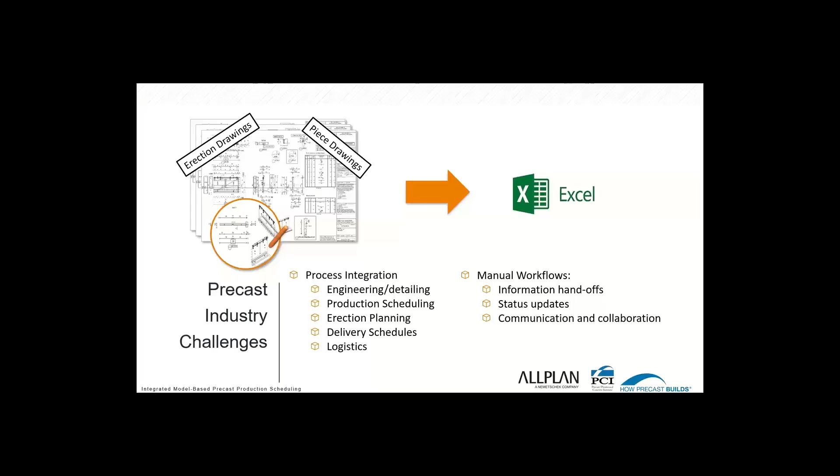So what we see today is a very disjointed workflow. There's relatively little integration, a lot of manual handoff of information. Statusing is done manually, production planning is done manually. Excel is the tool that kind of dominates this workflow. And that's fine insofar as it goes, but it leads to a lot of unnecessary confusion, risk, and ultimately lack of optimization and using capacity that you have.

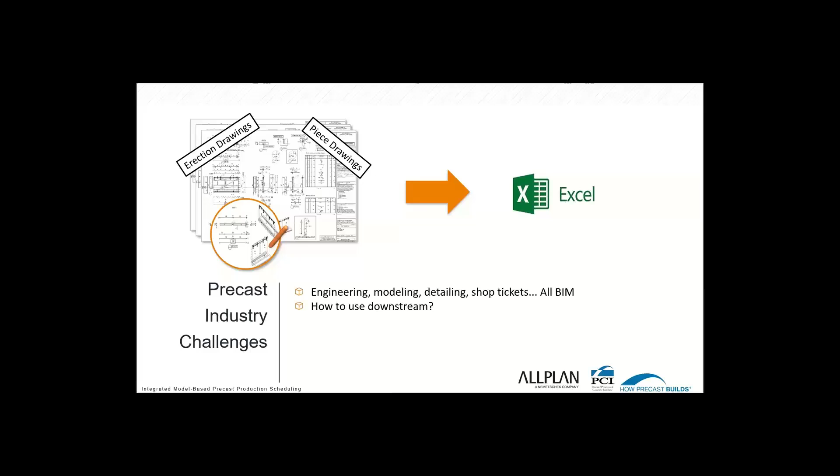So we are doing all of this engineering, the modeling, the detailing, shop tickets, all in BIM. We have this information-rich database of what this building consists of and what needs to be done to produce it. How do we use that downstream?

Well, our answer to that is TIM. We consume in TIM the information that was created as a part of your engineering, detailing, modeling, shop ticket production process, and use it as a single data source to drive everything that occurs after that, from drawing acceptance and quality assurance for engineering work through to erection sequencing, production planning and optimization, and then the actual casting, pre and post casting quality control, as well as then managing the yard, locating objects, managing stock, and feeding into shipping and logistics.

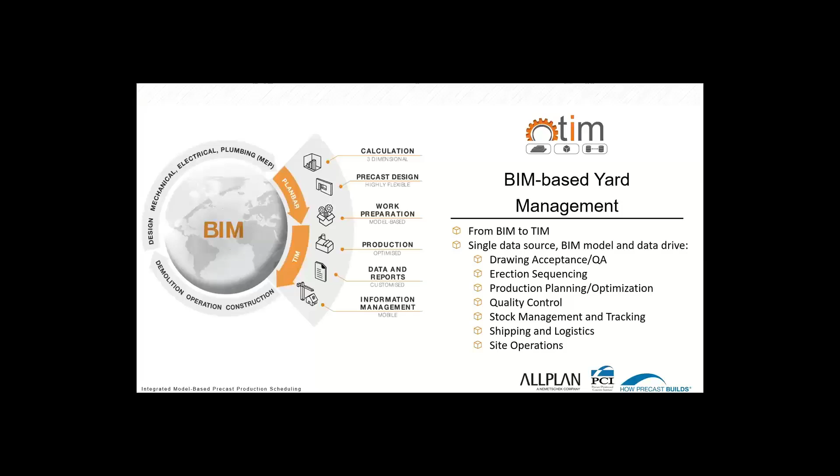We also have a mobile platform, which in addition to working in the yard, also works on site for site operations, erection, and construction. So this covers several areas. One is the actual work that takes place in your yard, as mentioned.

The other is integrating data. The data from these BIM models can be used to drive ERP systems, financials, purchasing. It can also be used to drive MES or rebar bending to go directly to fabrication. We are very wide ranging in the applications that we plug into, and we're very capable of creating custom APIs and plugins to interact with things that you may have developed that are proprietary to your own company.

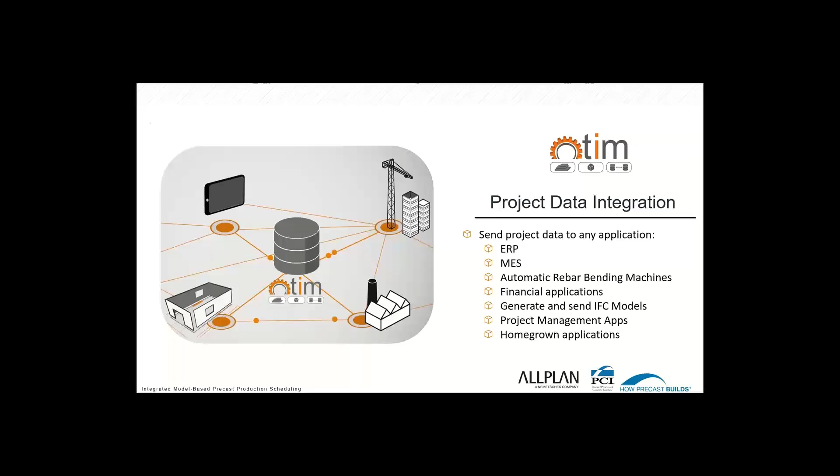In sum total, this leads to a significant increase in productivity. It allows you to eliminate slack in your physical capital rather than investing in more very expensive physical plant. It allows you to optimize your use of workforce and optimize shift scheduling. It also reduces error and risk throughout the entire process, rather than using paper, PDF, and email processes to deal with everything from the acceptance of shop tickets through to the quality assurance process.

We are digitizing that. We are providing a trail of everything that has happened on this project, all the engineering work that has been done, and then the actual physical production process as well. We are making it significantly easier to understand how your current workers are being employed, how your physical plant is being utilized, and to what extent. We're wringing a lot of the potential risk and a lot of the slack out of the existing process using digitization.

Rather than talk about it more, I'm going to turn this over to Dan Istvan, who is going to start actually showing the platform and how it works. Royce, if you could get us switched over to Dan's screen.

Thank you, David. Can everyone see my screen now? Yes, sir. Awesome. Well, thank you.

So just continuing from what David said, today's presentation is really going to be focused on taking advantage of the I that we get from the BIM model. So what we're starting out with today, continuing from the webinar we delivered back in July, is really understanding and answering a couple of questions that came off the back of that webinar from some prospects and customers of ours, centering around QA, QC, around production, and also around how do I manage my inventory? How do I know where those elements are in my yard? So those are some of the problems that we'll be solving today with the presentation I'm about to give you.

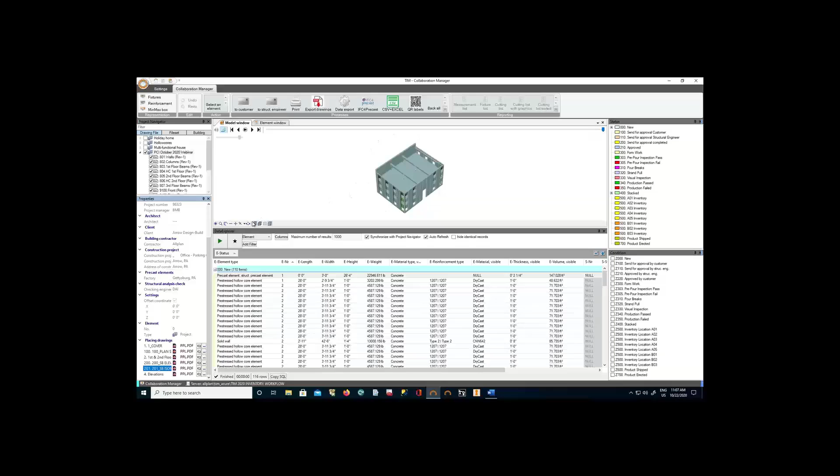So we can see here we have the ability to view the model, the 3D model that was created. This is our little office building that Brandon created for us. And also the big part of the I is going to be the information of that model, which we'll see down below here, which is the attribute data, such as what type of element is it, what is the erection number, the length, width, what type of reinforcement is it getting, what type of layering system does it have, and what's contained with it. All this information is quickly and easily selected, and you can basically, as an end user, display as much or as little of that information as you want. You can export that to Excel as well.

But ultimately, what this information is going to give you is two things. First is it's a single source of truth. So once we import it into our database, that means all of the other operations within your system can access it, either be production or production scheduling, or inventory management, or whatever it might be. They all are working from the same data that's managed in one system.

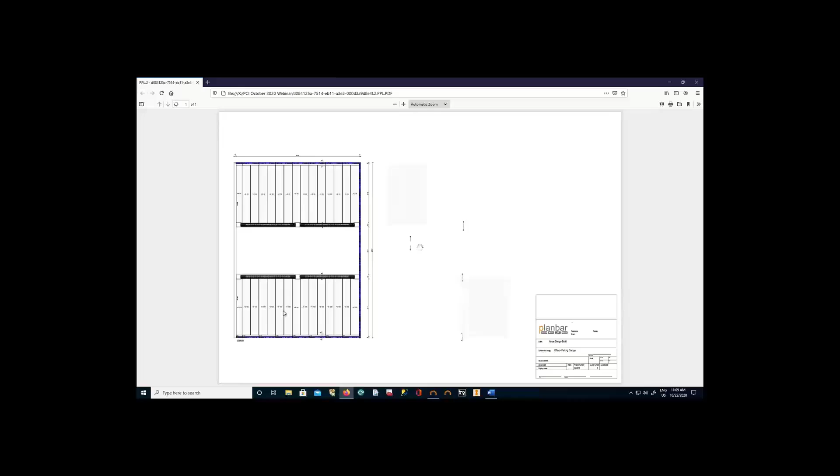The other big thing that we're bringing in, so that's the big I, but it's also the things that we always want, which is, let's say, the shop drawings or the erection drawings. So here I'm going to go in and all that information is going to be in one place. I'm going to open up an erection drawing. Oh sorry, I think I opened up the wrong one. So here, if we want to look at the first and second floor erection drawing, it's going to open up that data. Again, single source of truth, single depository. Everyone is going to be able to access this from one location, which makes it very easy. So we can see things such as erection drawings, or if I select on an element itself - right now we're looking at that beam right there - I can just go in and look at that beam itself.

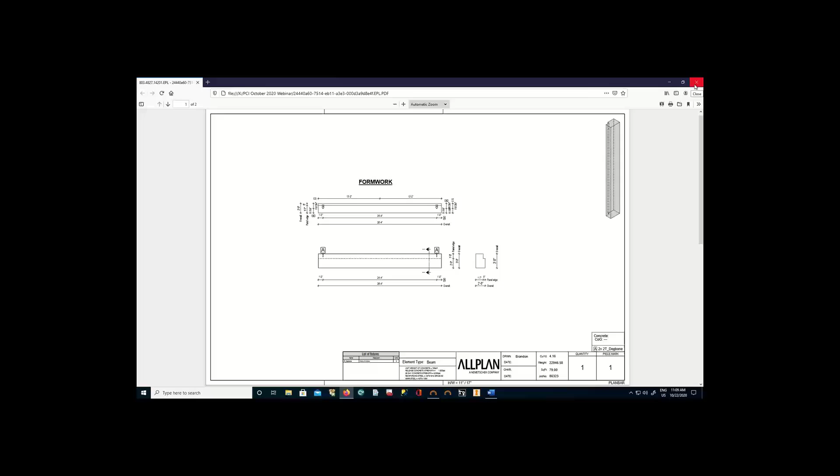So again, just a lot of information that is at your fingertips to help you manage whatever your job is, day in, day out in a precast factory. We're going to give you that data easily to access and easily organized for you. And this visibility is at the heart of everything that follows.

This information is at our fingertips as we're scheduling production. We know every single instance of a certain type of element. We can sort by embed, we can sort by concrete type, whether or not the element has a veneer. So we can use all of this information to drive the remainder of the process. It's not just having it at your fingertips, it's actually employing it.

Absolutely, good point. So next, what we're going to concentrate on is we have all this data. I've grouped it by new, so I have 110 elements here in this project that are new. We're going to go in and quickly talk about the workflow. This is very customizable, every precaster is going to have their own milestones. But what we'll go through is some QA/QC, starting from the formwork, some visual inspections, and if it ultimately passes or fails, we're going to stack it and place it in inventory.

As we move through the project, and we'll notice when we go to Brandon with the mobile app, that's how we'll first understand where the information is, report on it, and get a clear understanding, answering some basic questions. Did these elements get the formwork approved? Did they pass the pre-pour inspection, or did they fail it? All that information is being stored for you, so you have a hierarchy of it, a history of it, but also a way to report on it, so you have a clear understanding of what's going on.

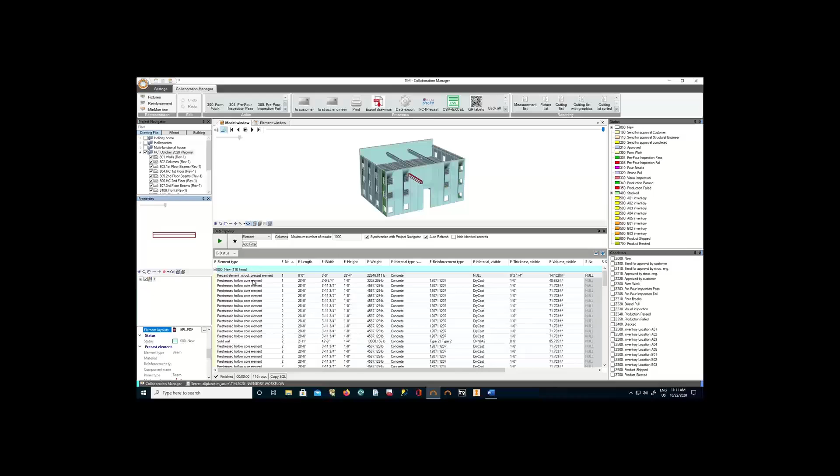Not only do we have the data here, but let's say we want some different types of reports. I can highlight this information, these elements here, and quickly export them to Excel. Just a click of a button, I have those in Excel and can customize them myself.

I can create QR labels, for instance. It's going to create QR labels, and we can scan them and quickly find out information from any Android device. So there are other things that go in there.

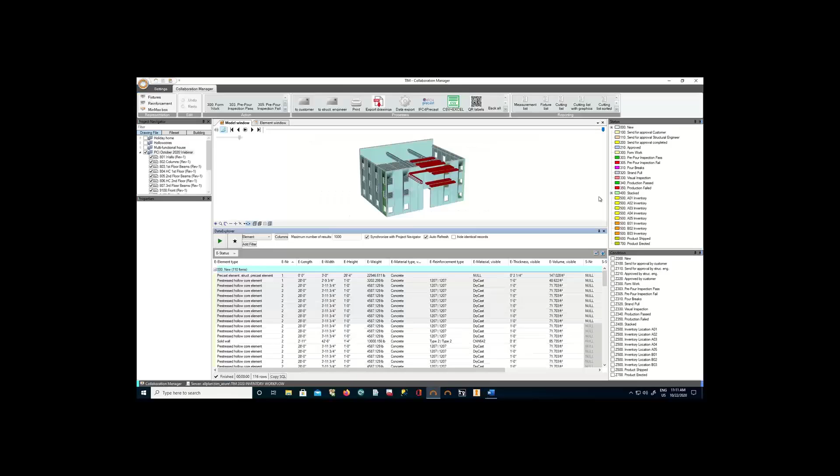I can also go in and find out what fixtures these selected elements have, so I can get a quick list of the fixtures and how many pieces they are. Instant information without having to dig through or open up the drawings. Everything is available for you at a button click.

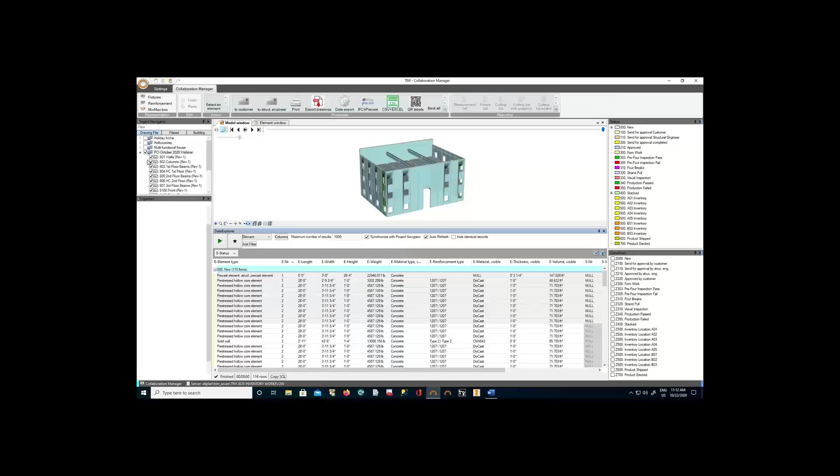I can also filter it through here. So for instance, if I want to look at just my first floor beams, I'm going to select them here. And let's say I want to see the rebar cutting list.

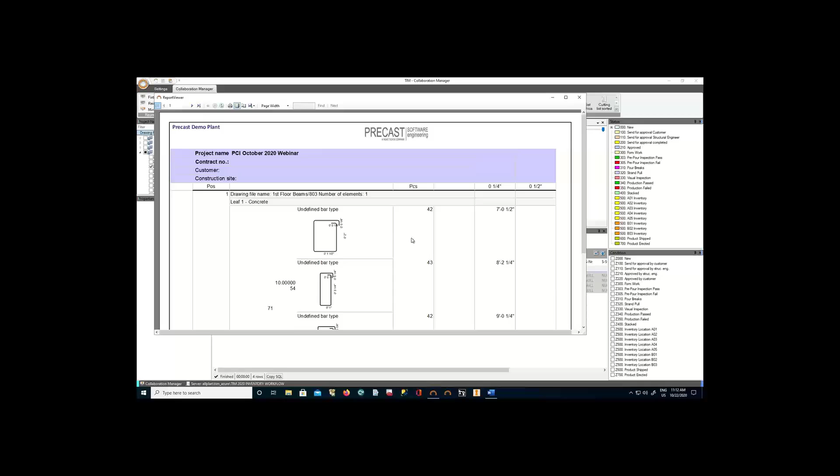So this is a really nice report. You're going to get everything included, and you'll obviously get an image as well. So instant access to your data. We can see our shapes and all the information. All these reports are completely customizable, it's up to you. But again, everything's at your fingertips.

To help you manage as you go through the life of a project. Okay, so now what we're going to do is jump in and start with what we talked about earlier, which is our QA/QC. Those are the first milestones we want to go through in our factory here.

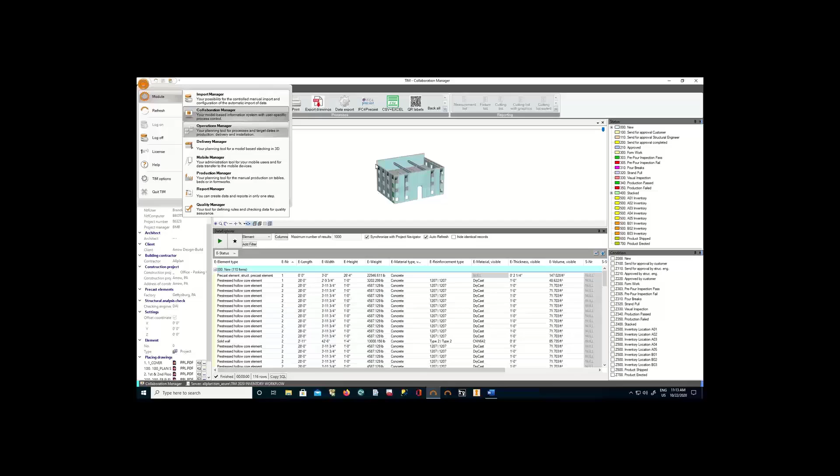So the first thing we're going to do is switch our module. Right now we're in what we call the collaboration module, which gives you an idea of where everything is. This is the hub of our system, and we're going to switch over to what we call our mobile manager. So the mobile manager is where, as a project manager or production manager, you're basically creating tasks.

These are things that you're probably already doing, either through shop drawings or through Excel, whatever it might be. So this is just a more streamlined way of doing it and a little bit more organized.

These task lists then will go directly through the shop floor to an Android mobile phone device for your employees on the shop floor to track the tasks that you've given them, either the formwork or whatever it might be. This is a very customizable workflow. Our service team will work with you to build it to exactly how you do your work or how you envision doing your work or tracking information.

The big things I want to highlight real quick are what we call templates. These templates are really the way that we set up basically every location in your yard, maybe it's your QA/QC for the pre-pour, post-pour, or for your inventory.

For instance, I've got one that I've created here for my production QA/QC, and I'm telling it I need the tablet to track these statuses, my formwork, pour break, and then I can set up here if it's going to be a time, or if it's going to record the GPS location of where it was done. So it can actually record the GPS of the tablet. A lot of options, a lot of settings.

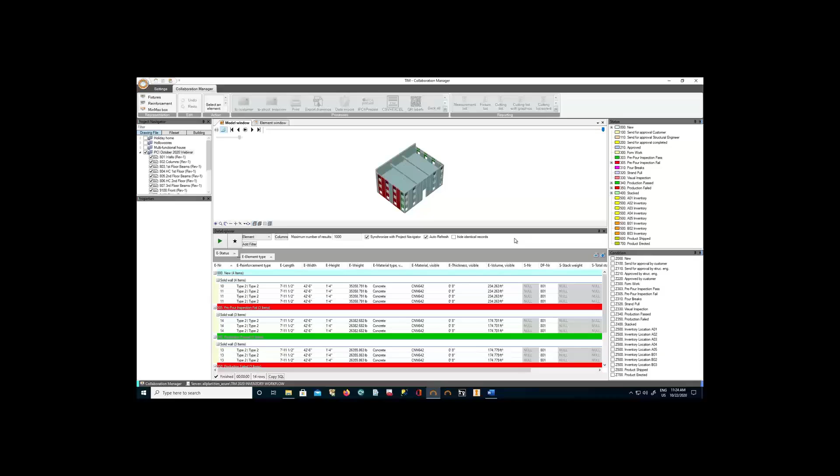So the stuff that was done by Brandon, we can see now within our model view here. We have different ways to analyze the data that he just completed for us. The simplest way, if I make this a little bigger, is I've grouped my elements by status. So we'll notice that some of those elements, specifically the ones in red, are what I want to show.

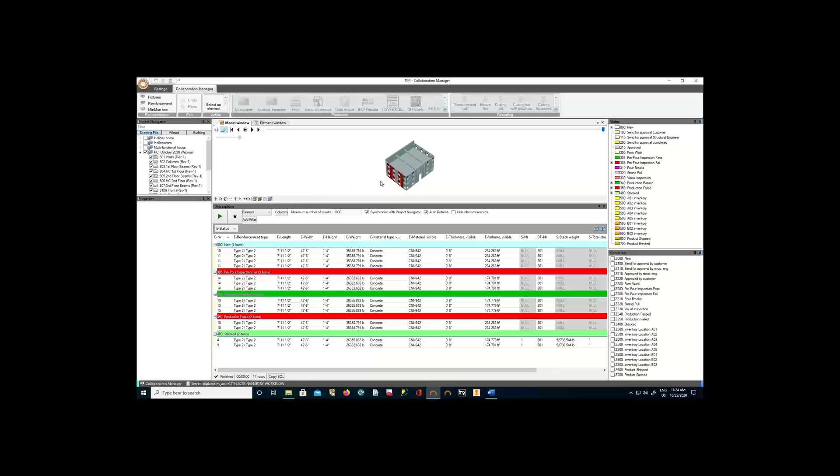You can set up different color coordination, it's customizable, but I can tell right off the bat that element 14 has failed inspection, and element 10, or piece mark 10, has failed production. So this is just a very simple visual, and obviously I can also see it within my model here.

So if I want to just look at the walls, we can see right within the modeling view here we have a color coordinated view of it. So we know in red we have an issue with these elements. There's other things we can create too, different reports, different views.

On an upcoming webinar, we'll start talking a little bit about some reports and business intelligence tools such as Power BI that we're planning for next year. I can create an Excel, but we can also set up some high level reports that are automatically updating, so I can have a clean view of anything that's passing and failing. We'll get into that more in a future webinar.

But the big point of it is just managing information back and forth between multiple mobile devices into the system. Again, now I have a single source of truth. It's all coming back to the database here, and I can tell exactly where those elements are and what's going on with them, and start working with them as we go forward.

Okay, so the next thing we're going to do is - that's just a simple example of some customizable QA/QC processes we can do anywhere throughout the system.

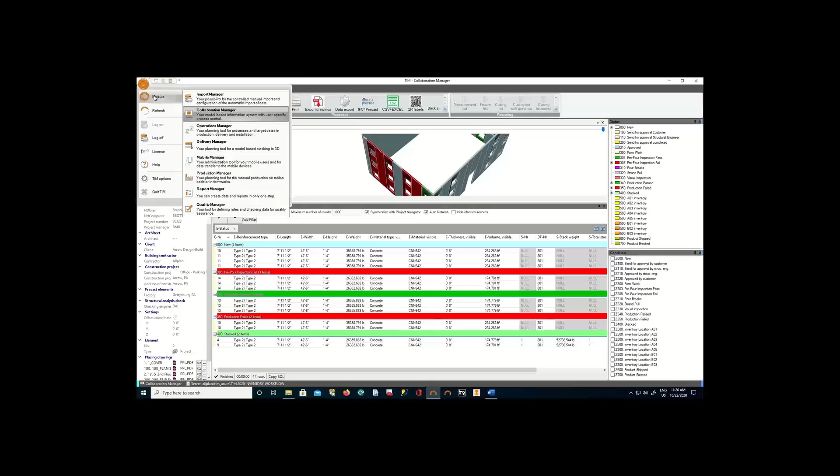Next, let's talk about going in and organizing these, either for inventory, or if you have a just-in-time type of system, onto a trailer so they're ready to be shipped. This is what we call our delivery manager. It doesn't have to be just for delivery, it's just a way to basically organize our elements as we finish production.

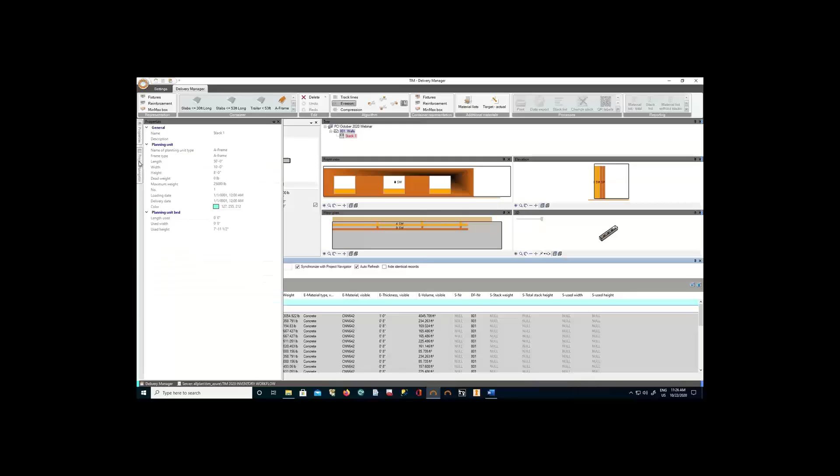So I'm going to quickly switch over. We'll do walls in a second, let's just do a couple of hollow cores. We're going to do two different types of stacking here. The first one is flat stacking. I created one ahead of time, we'll create another one, but let's explain real quick what we're doing here and what we have in front of us.

Within our settings, we have our factory settings, which are implemented as we set up your system. We basically try to replicate the different areas in your plant, the different things you want to put in there. So we can set up things such as an A-frame type of stacking, where basically it's a left and right type of area. It's really customizable, we can have multiple areas that we put it in.

Then as we're organizing these, we can set up whether we're doing them upright or flat - all customizable. We set up some constraints: the length, width, and height of the area we're putting it in. Same thing here - if I go for my slabs under 30 foot long, we can set up the constraints for it.

For these, we're going to go in and organize them flat. We can also set up, going back up here, a maximum weight of how much weight we can do.

So there's a lot of things you can customize to help replicate what you're doing today. The big factor in this, and a lot of precasters we've spoken to over the years, is that this is usually done in either an Excel spreadsheet or a bit of an Access database they've created. The big thing we're adding is a value add. Again, single source of truth. You're taking information, not recreating it, but adding the visualization part of it.

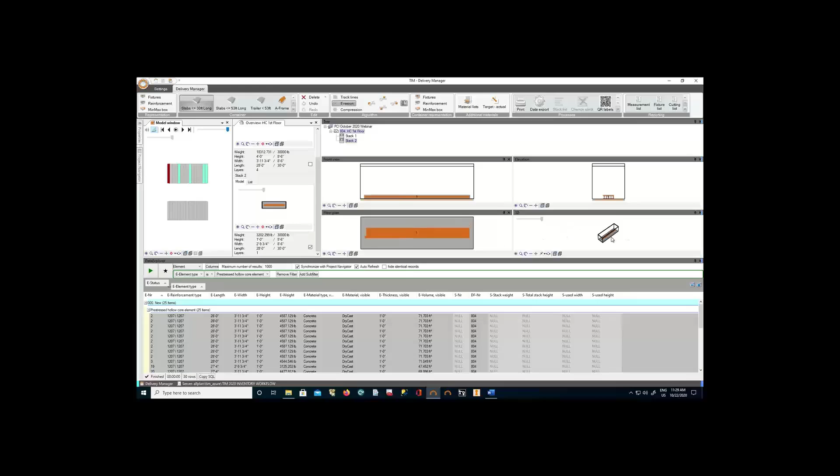And I can go in now and start adding my elements to it. So basically I've got my list of elements down below here. I can go in here and say, let me just see my hollow cores. I've got a filter set up for my hollow cores, and I can start adding these elements. We'll notice how it's added the element. If we zoom in a little bit, it's added the element. I can see it right there, and I can start placing them on top of each other.

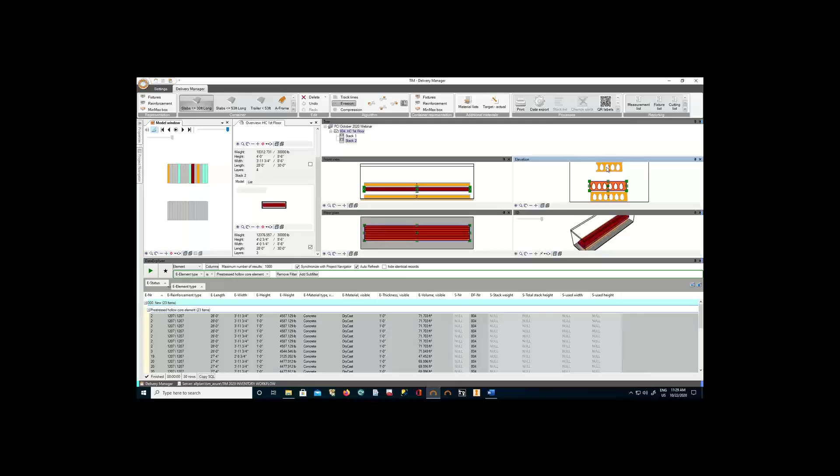I've done this on purpose - I've got a smaller one on top, and I'll come back to it in a second so I can place the other one. The nice thing is this user interface is completely flexible. I can just click on this, drag and drop it, move it on the side, or put it right on top. It will snap as well. I can move this down, so you have complete control. I can move it to the right - it's really up to you. Right now I've set the default to go to the center of this stack. I'll put this one right on top.

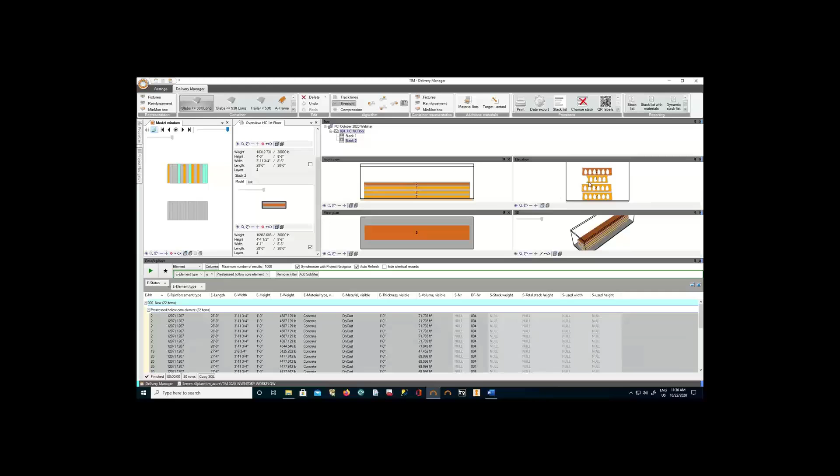One thing to keep in mind as we look at all of this is that there is immense customization available for all of these things. We can customize the actual layouts you use, not just for shipping, but also the report formats, and the QA/QC documents, especially with regards to QA/QC. What typically happens is we take a look at the existing paper process and do our best to translate it into something that's minimally disruptive, but digitized.

And I just rotated one to give us an idea - this might not be the actual way that you do it, but you can rotate them. You can basically manage them however you want to. It's a very simple way of really organizing your elements as you're going through them.

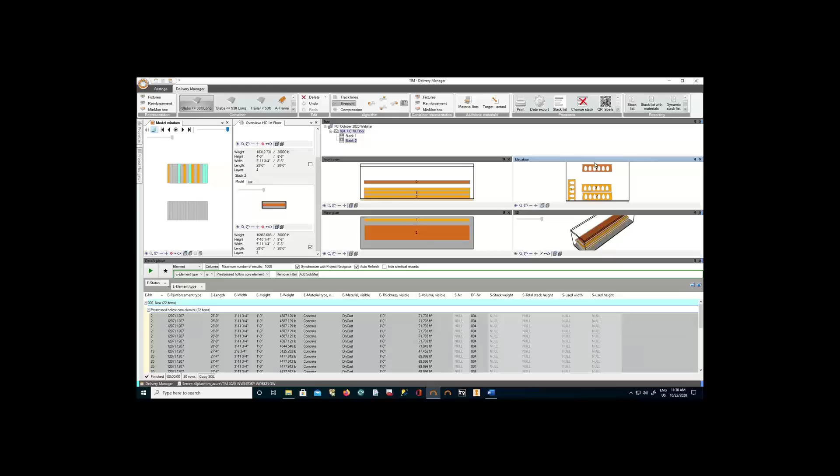The other nice thing that we can do, I think we could actually play Tetris with them, Dan. Exactly. So the one thing that we can then do is create a nice little stack list.

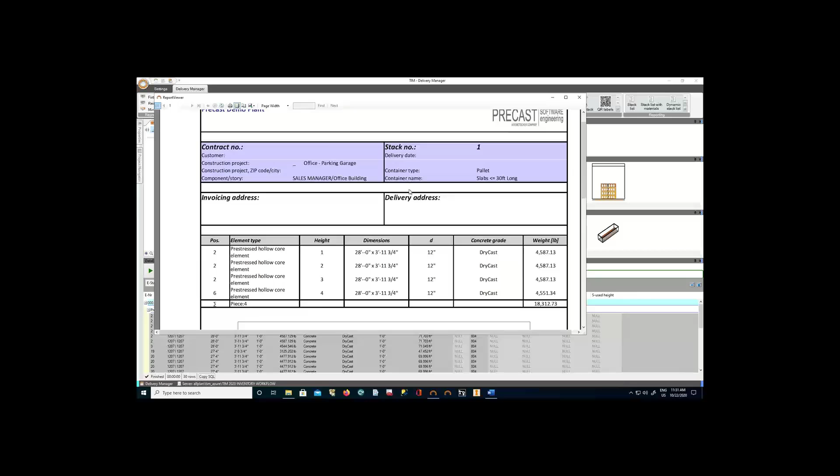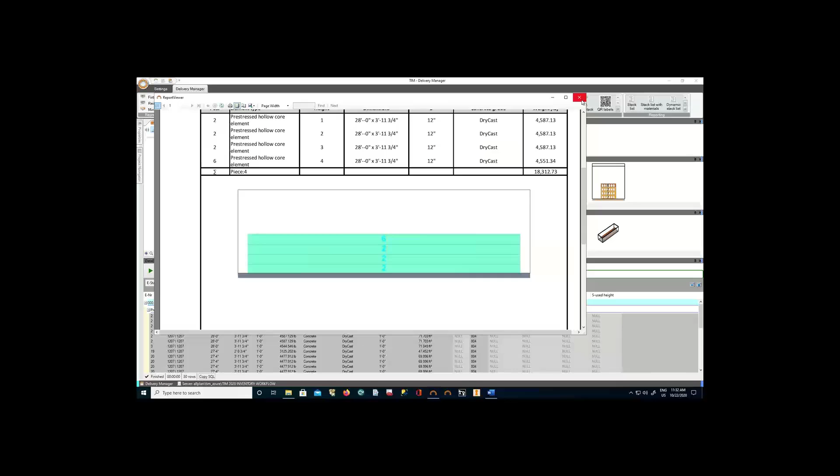We've created just a quick example of another report - this is called the stack list report. Once I've created this, it's a nice way of pre-planning the stack or organizing it. I can then print this out and send it over to the yard so they have a clear understanding and a visual of how it's going to get stacked. They say a picture says a thousand words - this is definitely an example of that. I've got my list and my picture that we can create. This also shows you the power of the reporting within our system - not only data, but the visual aspect, which in my opinion is a very big factor for the shop employees as we go through there.

So I just wanted to show you quickly how we do the stacking. Also, for instance, if we want to stack walls, I'm going to switch over to just the walls, and we're going to go in and create an A-frame.

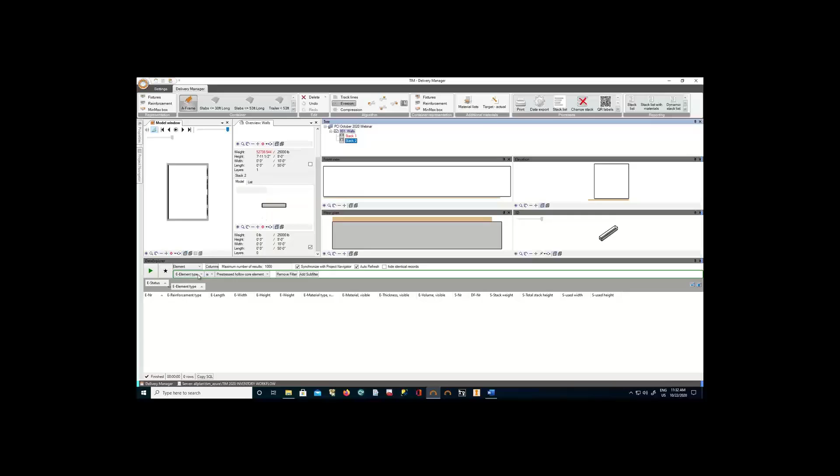Down below here, I'm going to switch over to just my solid walls and my filter. Similarly, I can go in and select from my filter what I want to put on there. This is nice because it's now going to show me a warning or error message letting me know that, hey, this element that you want to put on this A-frame that you've set up is 10,000 pounds bigger than the constraints you gave it. It's fine, I can still stack it, or I can go back and change or create a new one.

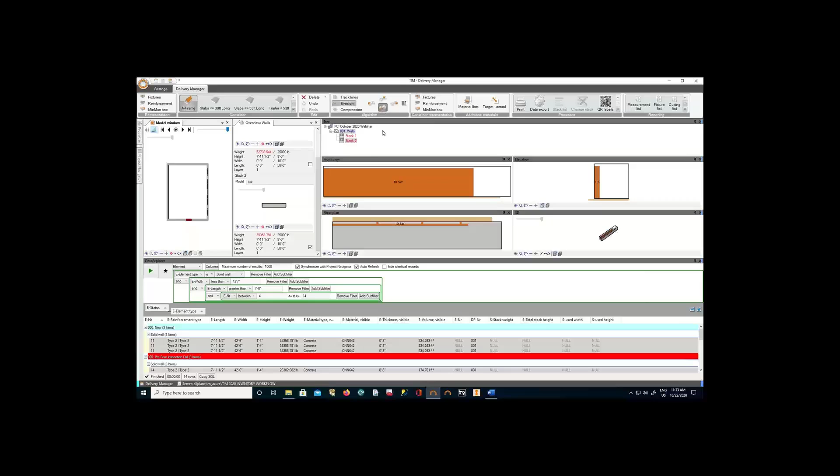I'm just going to go ahead and still stack it, and we'll notice it's put that frame in there for me. So the next thing I want to do is figure out where my second one is going to go. It's going to go to the right. I'm going to put this one to the right of the one I just placed, and then stack the second one. It's going to tell me again I'm way overweight, but I'll just go ahead and put it in there. We'll notice it's now put them side by side, one after another.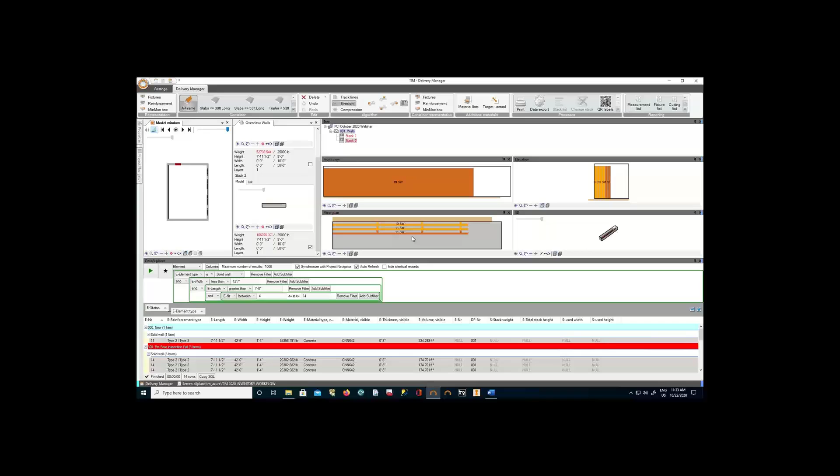So again, I'm going to go to the right again and add one more, just to give us an idea of it, and we'll notice the elements as they go in there. Similarly as before, I can click on them and move them if I want to put this one to the side, put this one in the middle, something like that. It's really up to you how you do it.

And I always like to show this because I think this is a great report. Now, obviously, we can see how we've actually stacked it as well for these elements. Again, it's customizable. In some cases you might just have one laying up like this, and it's up to you. I'm just showing you the example of putting three of them in there, and you can put them directly on a trailer. Really customizable, just to give you an idea of how easy it is to start managing this stuff for you, and creating the reports to understand how we're going to manage these on a shop floor, within a yard, or within delivery.

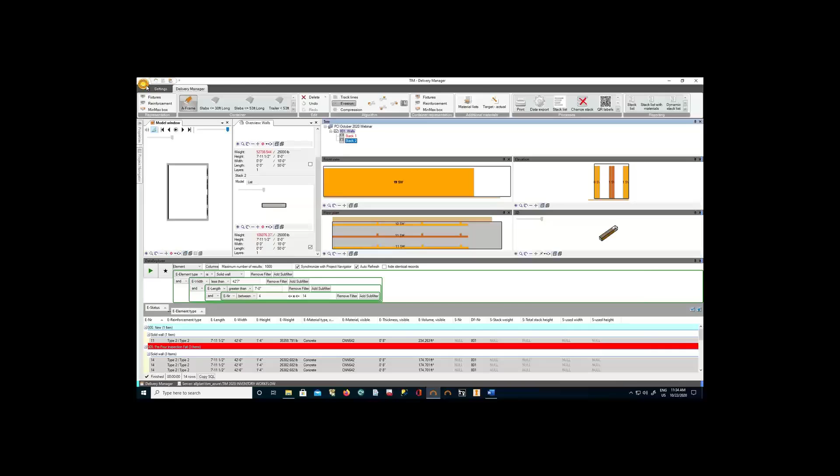So now that I've created these stacks, or I could have done it before, I can also manage, using the mobile device, where I'm going to put them within my inventory. So I'm going to switch over to the mobile device again.

This time I'm going to go into my team here, and I'm going to say my team is going to be using my stockyard template. And then I'll go in here and just kind of highlight the five, you know, we have elements 4, 9, 10, and 11 that we've just stacked. We see the status of them is stacked. So as soon as I put them on a stack, it will automatically change that status.

That actually brings up a quick point to make. You've seen us do some of this stuff manually with the app, but you can automate some of the statusing either through barcoding or other elements. As soon as I finish an action such as stacking it, it automatically gives it a status of stacked. That's done for you automatically in the background, you don't have to then move it over to stack afterwards. So there's a lot of automation in the background today. We're showing you everything click by click, but there's a lot that can be automated.

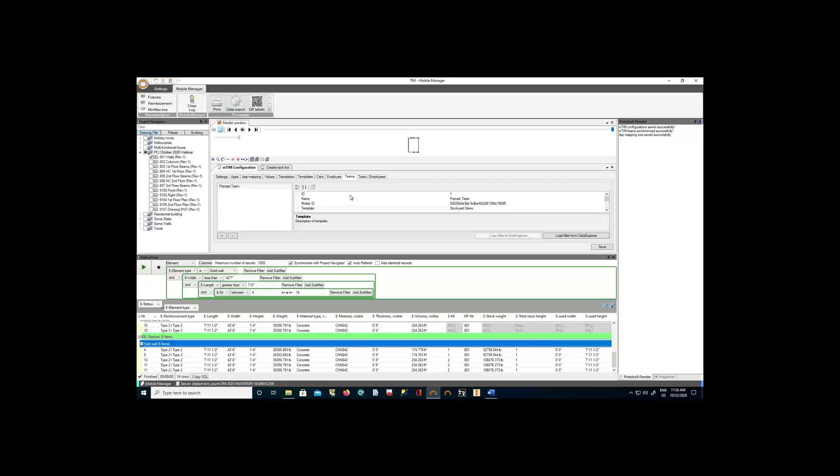And as soon as it's stacked, we can also set up an automation that sends it to the ERP system to let it know that these elements have been stacked and shipped, so they're ready for invoice, if the milestone after stacking or shipping them is to create an invoice from the ERP. So, similar to before, I selected them, clicked my Precast team, and created a task list of these elements. And now we can switch over to Brandon again.

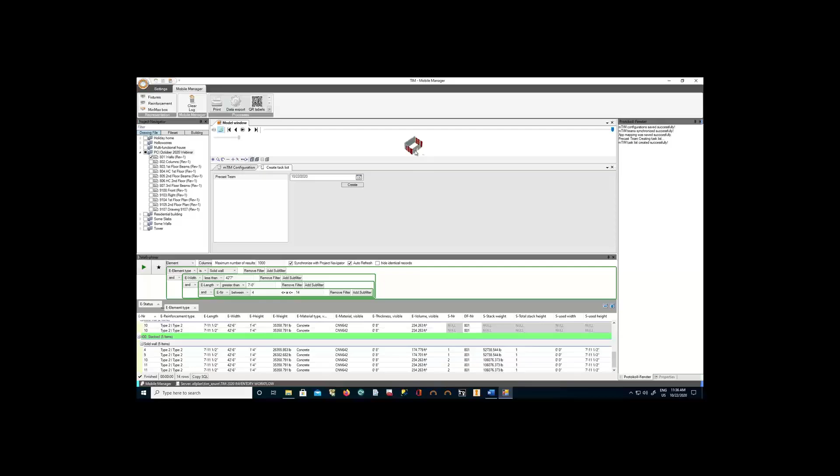While we're doing that, I want to hammer home the point that a lot of this we're showing by user control, but a lot of it can be automated. We can set up event chains where once you process a single thing, all the associated actions follow automatically. When I push a task list to someone, all the associated shop drawings go for the ride, so Brandon has those at his fingertips.

Could we switch over to Brandon's screen while we're here? Then if I update a status, all the necessary tasks drop into the queue. Following that, I can assign inspections, both pre and post pour, and I can assign an erection queue as well.

So you can see here I have a new task. My exclamation point up here at the menu is showing, so I have to come up here and refresh. And then you can see here's a stockyard — this is where we're going to manage the locations of the stockyard. So we can go ahead and click on the stockyard task we've created.

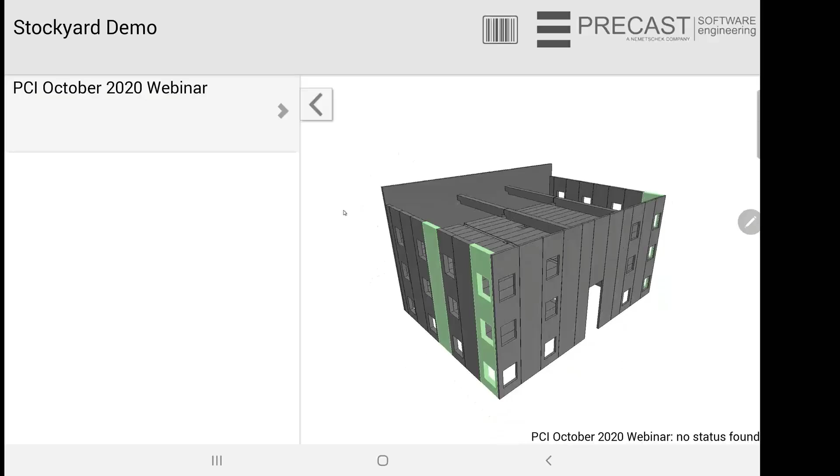So we can come in here to stack 1 and stack 2. We'll go ahead and go into stack 1, and you can visually see the elements that are in stack 1 — they're highlighted in the model itself.

Once we get into that information, we can come in here and specify where the stack is going to go in your yard. These are just the designations we've provided, A1 through A5 and B1 through B3 — locations entered into here, but you can have any location entered into any of those parameters. So we're going to say stack 1 is going to be in location A01.

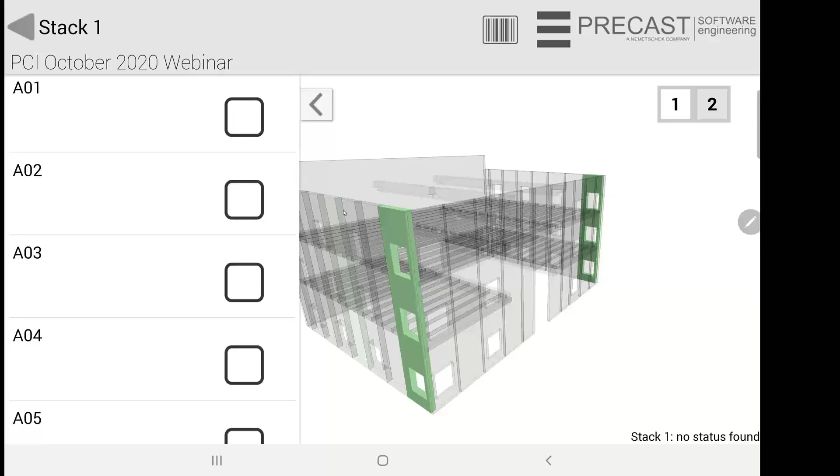Once we place that, the status gets sent back to the TIM manager, and you can see the color of the status has changed as well, because now we've placed them in inventory, and that status gets sent back too.

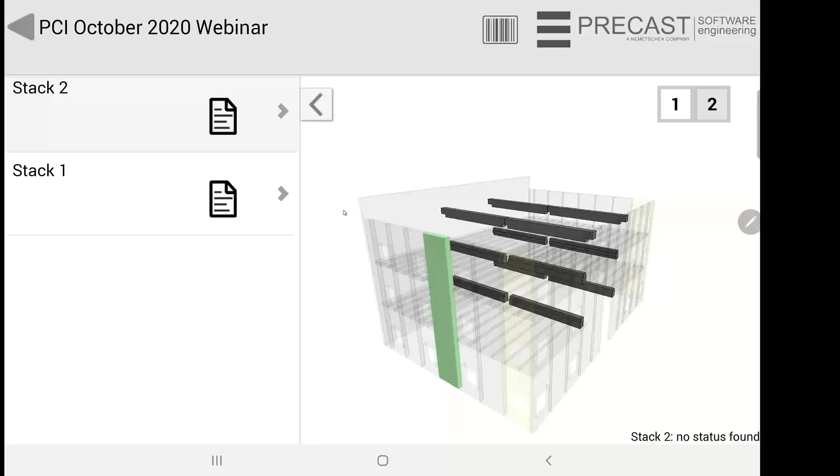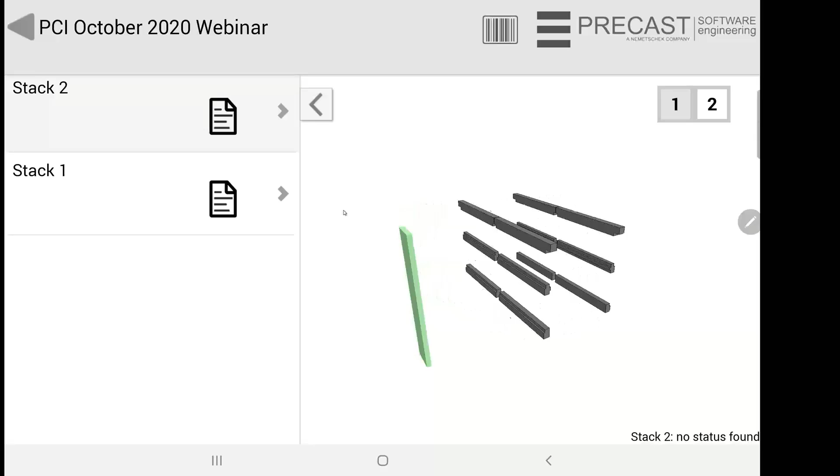So we can go into stack 2, and that's the same thing — it highlights that particular piece. And again, I didn't go over this before, but once you highlight that particular piece, you can also manually take it out, and you can see all those elements individually as well.

But then you can go into that particular stack 2, and then you can place that in that location. So we're going to place this stack 2 in A02. Now that's in inventory as well, so that status changed again.

One cool thing happening in the background is that as we're doing this, we're aware of the possibility of user error. So the platform is actually geotagging every action that someone using a tablet on the mobile platform takes — I can see GPS coordinates associated with where that worker was standing when they punched the A02 button.

And if they're off by one, or if they've put it in the wrong row, for instance, I'm going to have a pretty good idea of where that element actually is if I go back to A02 and find it's not there. There's another thing that also works here — Dan, sorry.

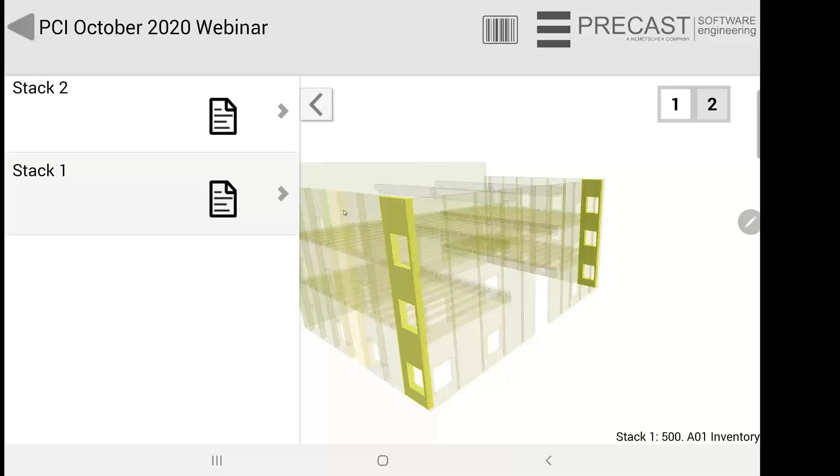Now I was going to say the other thing — Brandon, if you go back into, I think, stack 1 where we started, just to show the shop drawing feature, we haven't shown that yet. If we scroll down — okay, yeah, absolutely, sorry, I didn't see that.

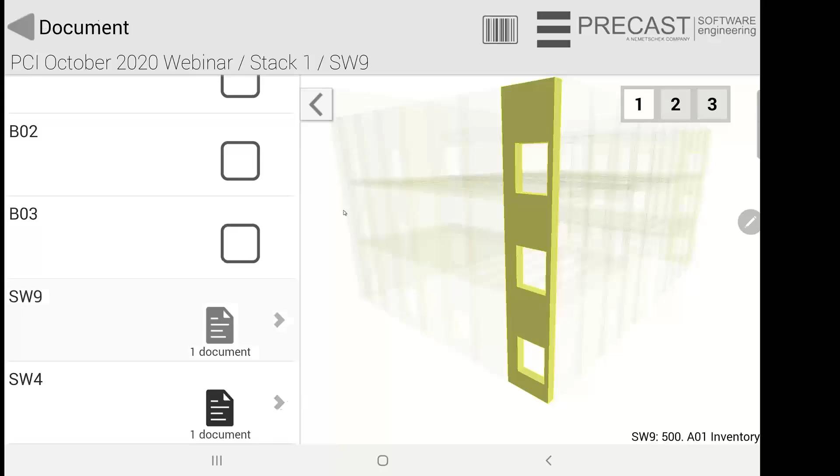All right, so we'll go ahead — SW9, that's going to zoom into this particular piece itself, and you can see the shop drawing as well. So we're going to go ahead and select that shop drawing for that piece, and once we do that, we can choose which application we want to open it with, and it's going to automatically bring up that shop drawing for the piece.

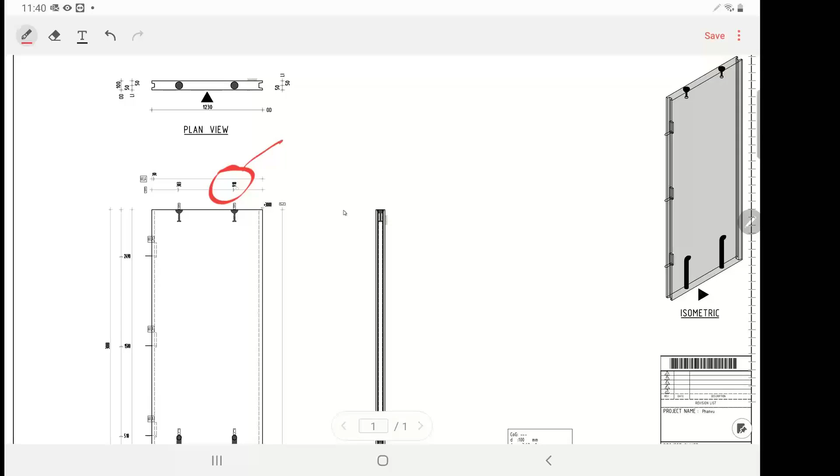And you can also, back in the production data for the stockyard locations, visually see the piece itself and the shop drawing, which is great. But also for the production side, for the formwork and everything, you can visually see the shop drawing. And if something is wrong with the formwork or an insert is placed incorrectly, you can go ahead and mark this up in the mobile application — say this needs to be 2 foot 2 inches instead of what it is, circle that, and then save it.

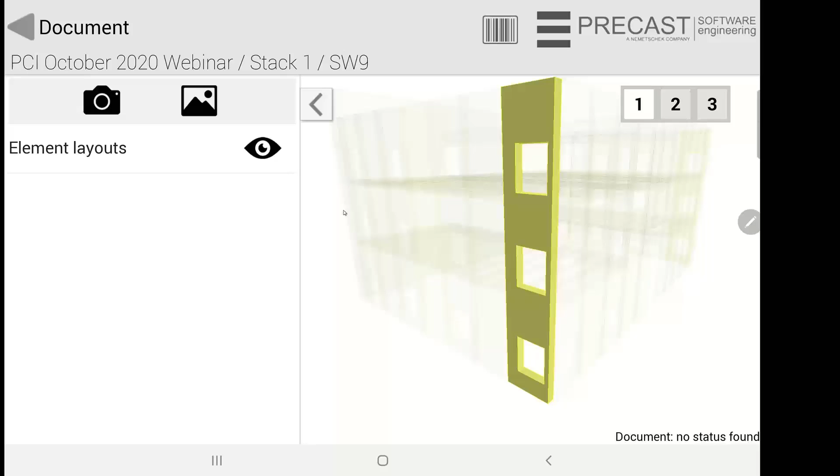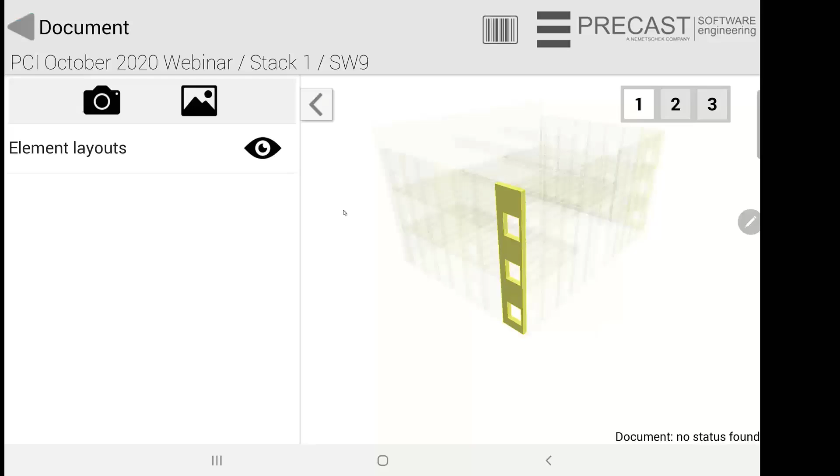You can save it into the local directory, wherever the guys in your plant need to see it. And when you get back into the office, that drawing is going to get pushed back with the markup back to TIM's server. So the engineers, this was really more of the quality assurance part, and we skipped over it at the time. But once I've made that markup and I've said something failed in post-pour, the engineers back in the back office are going to see A, that it failed, they can sort by this.

And B, that where the failure is, the markup's going to show.

Absolutely, David. Yeah, so the big benefit is we have the complete traceability of the status that we sent, and any of the markups of the drawings will be uploaded to a separate folder that we've set up. So that way we have a history of the markups of the drawings as well, separate from the ones that are imported into TIM.

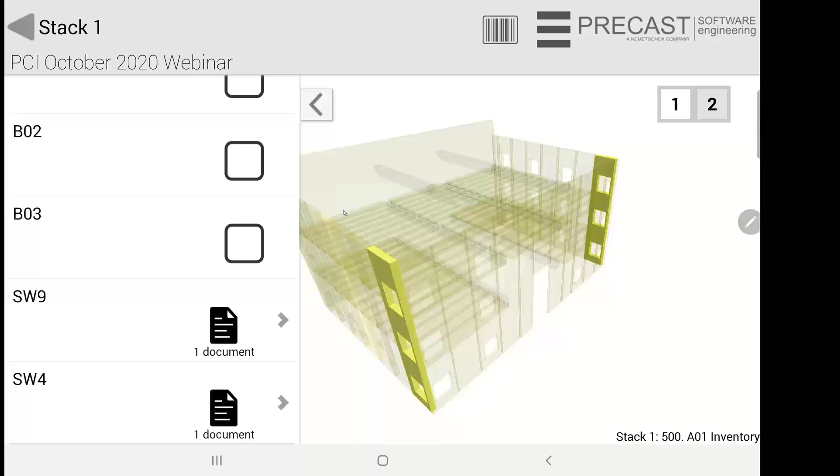All right. I think now we can switch over back to my screen, and we'll finish it up, and then we'll go to David for the closing remarks. Absolutely.

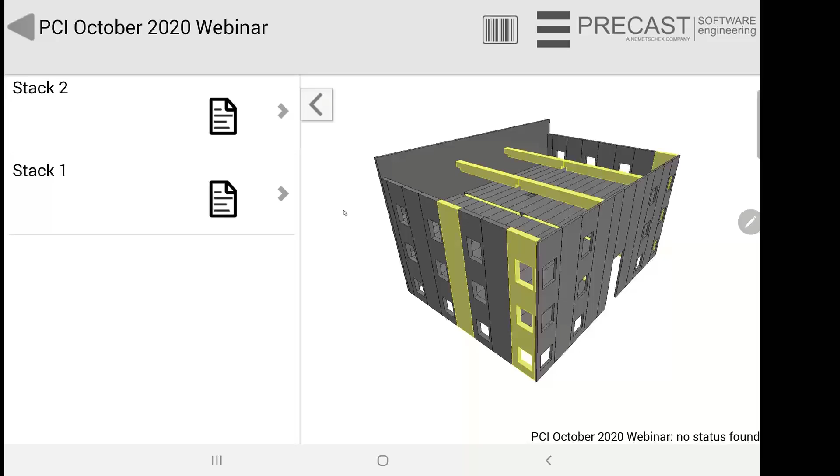So let me know if you can hear me and see me again, just making sure. You're all good, yes, so far. Okay, perfect.

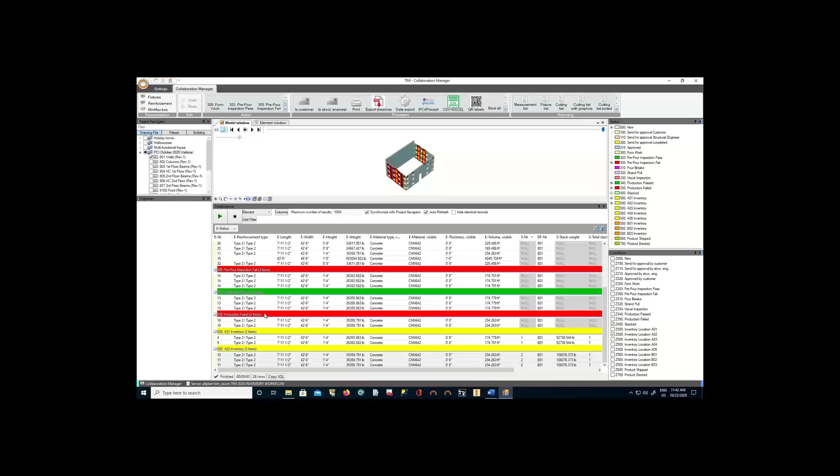Really, the big thing here is just to highlight again: we will notice that automatically within my system here and within the view, so we have the nice little color by attribute here. We can see that those elements 4 and 9 went to inventory location A01, and 10 and 11 went to inventory location A02. So we have the full traceability, and same thing here.

We can do different reports. But within my status here, another way of just looking at data the same way is if I want to see all the elements in A01, obviously I can see it right within here where I can filter from within my system. So all that information was fed back.

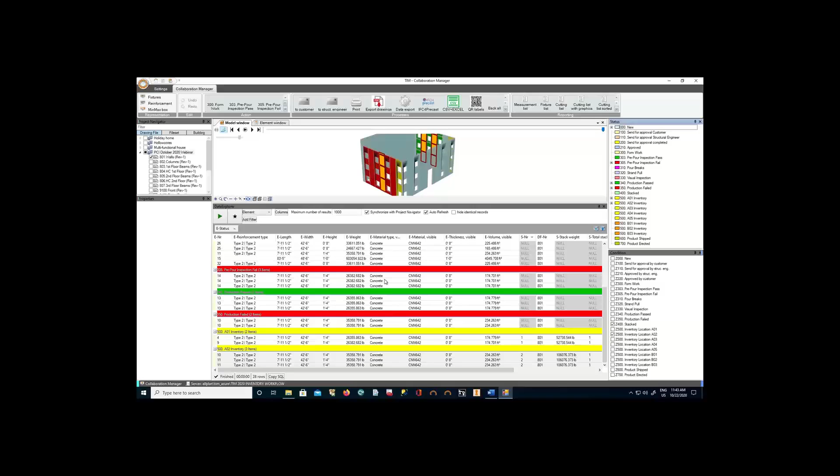We know exactly where everything is at any point. And then, if we need to send someone out into the yard - hey, go grab, for project number 15, elements 10, 11, and 12, whatever it might be - I can quickly find out where they are in my inventory from here because we've tracked that information, and then we can send them out to get the elements.

That basically comes to a conclusion of the technical aspects of this presentation. We'll switch back to David to do some closing remarks, and then we'll sit for some Q&A.

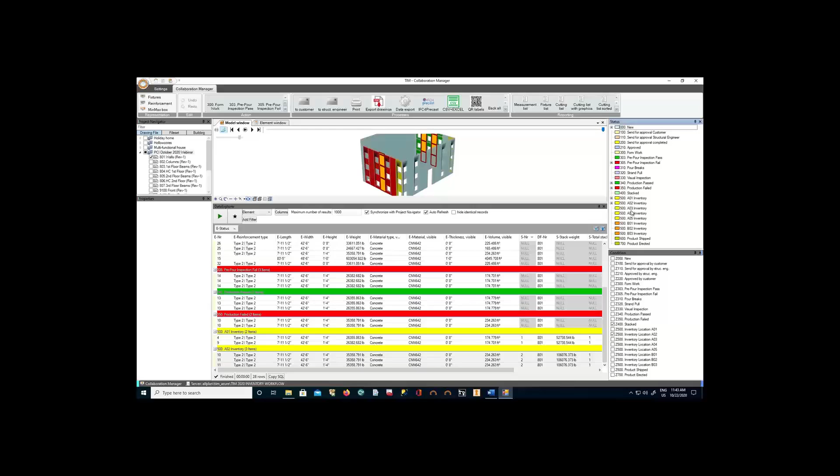Let me get my screen up. All right, thank you, Dan. Thank you, Brandon. So just in closing, obviously the name TIM, the name Planbar are relatively new names here in the United States.

But we are a subsidiary corporation of the second largest AEC software company in the globe. We are in wide use globally for detailing and engineering applications as well as production applications. We have become one of the premier choices for precasters and for concrete contractors worldwide to deal with detailing, to deal with production management, to deal with site operations. So while we're new to the US, we are very well established globally and have great technical resources to offer.